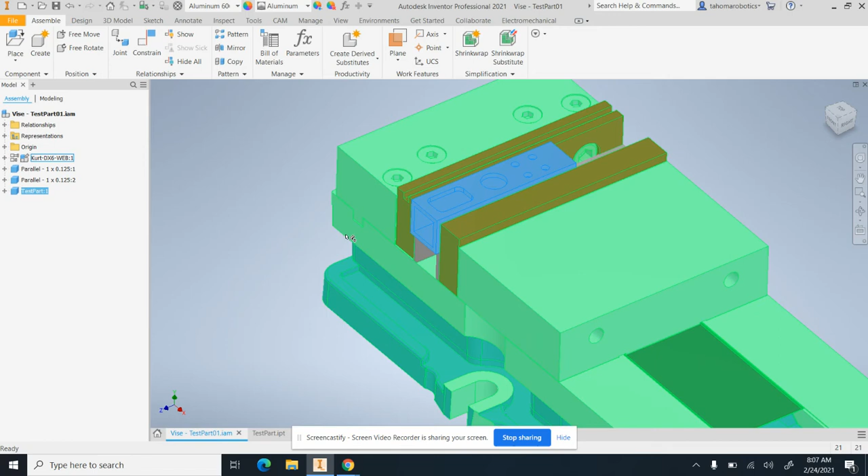In this video, we're going to go over setting up the work coordinate system for this test part that I showed being machined the other week in class. Basically, this part is sitting up on a couple of parallels, being held in the jaws of a vise, as you saw. Setting up the work coordinate system helps define how the part is oriented with respect to the machine.

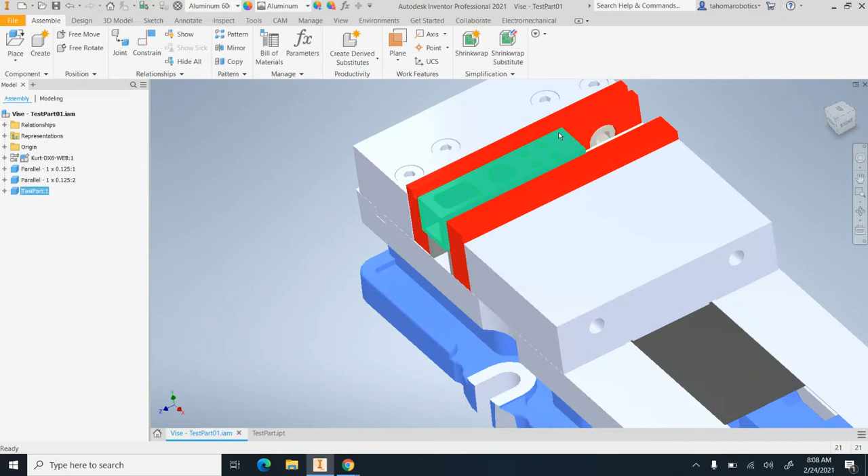If you recall, when squaring a vise up on a machine or tramming a vise, this back jaw here is parallel with the x-axis of the machine, or the left and right movement of the table. And once that vise is set up, when we put the part in it, this direction here is the x-axis. And so we need to define that. Setting up the work coordinate system is a two-part process where we define the origin as well as the orientation of each of the axes.

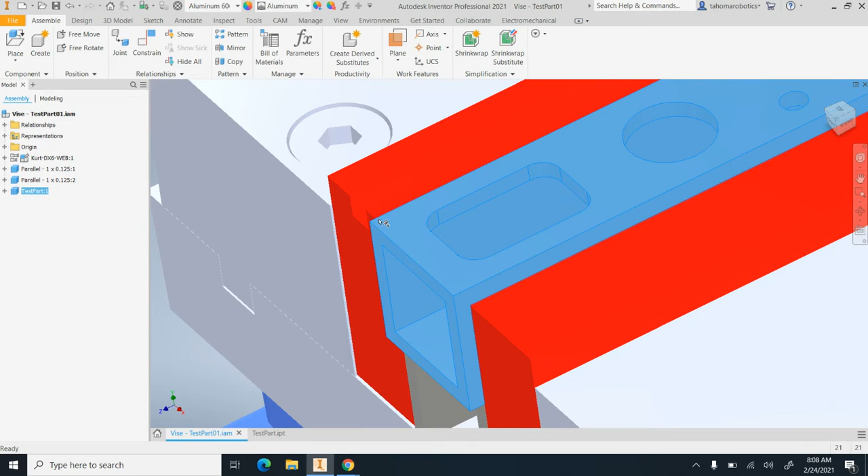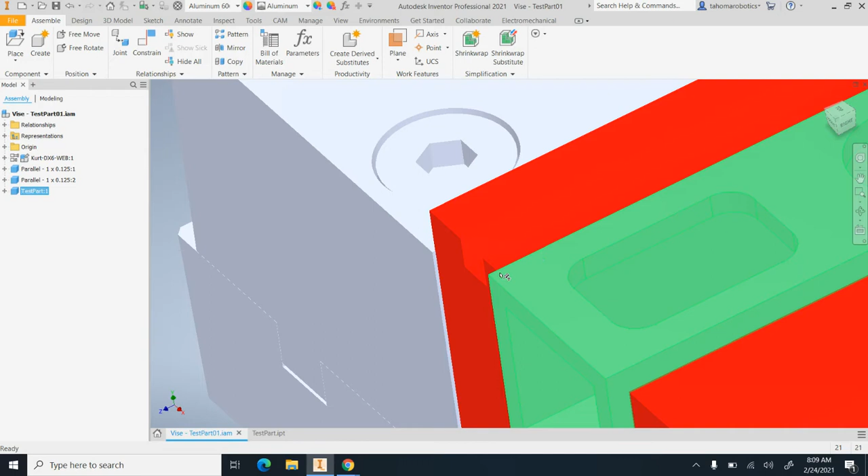Typically when we do this in this level of class, instead of having an entire model with the part and the vise, we're just going to do it for the part itself. So here's the part. Where we want to put the origin is in this back corner, and that is just a convention we use in class. We'll talk more about that later. This is going to be the x-axis. The y-axis is going to go here, and then the z-axis is up vertically from the part.

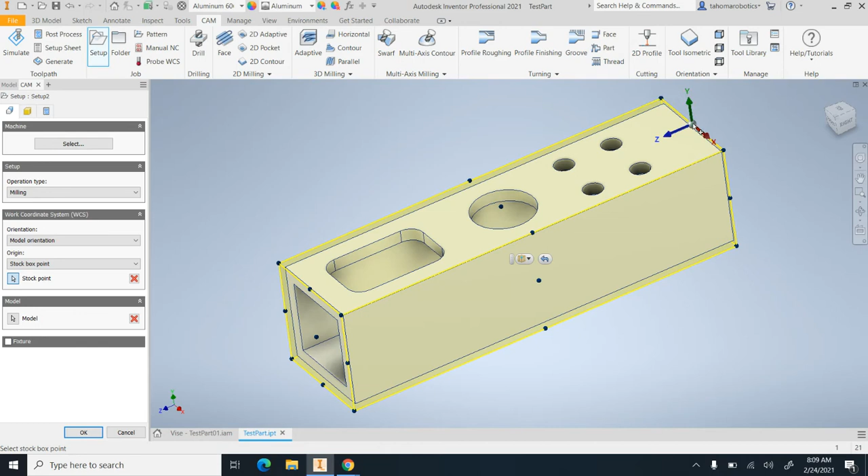Once you're in Inventor and have the part open, go to the CAM tab and then to Setup. You can see we have the gnomon here, and these points are linked to stock material, not the actual model. The stock material is the same size as the model. So for the work coordinate system origin, instead of a stock box point, we're going to use a model box point, and choose the back corner of the model. The issue is that the axes are not oriented properly.

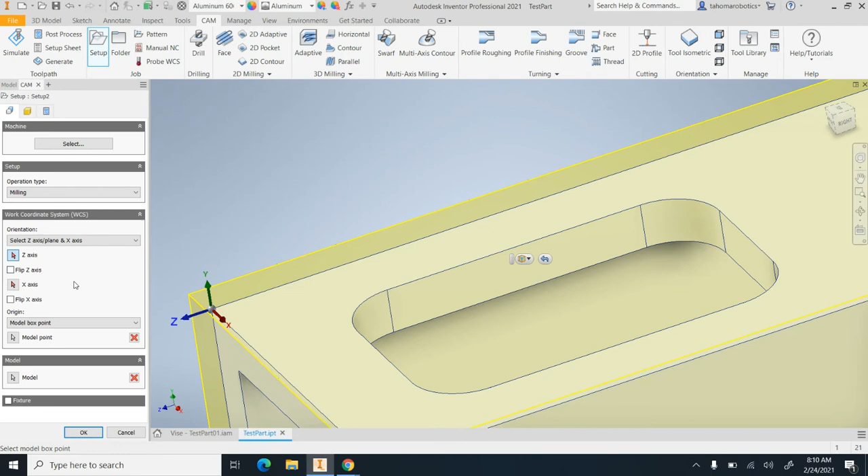We need the x-axis along this direction, and the z-axis needs to be vertical. That comes from the orientation drop-down. I prefer the first option, model, or select z-axis / plane and the x-axis. It first asks where the z-axis is going to be. I can click any line, like this line or that line, to align with the z-axis. Or I can select an entire plane, and the z-axis will be perpendicular or normal to that plane. I'm going to do the plane first to demonstrate.

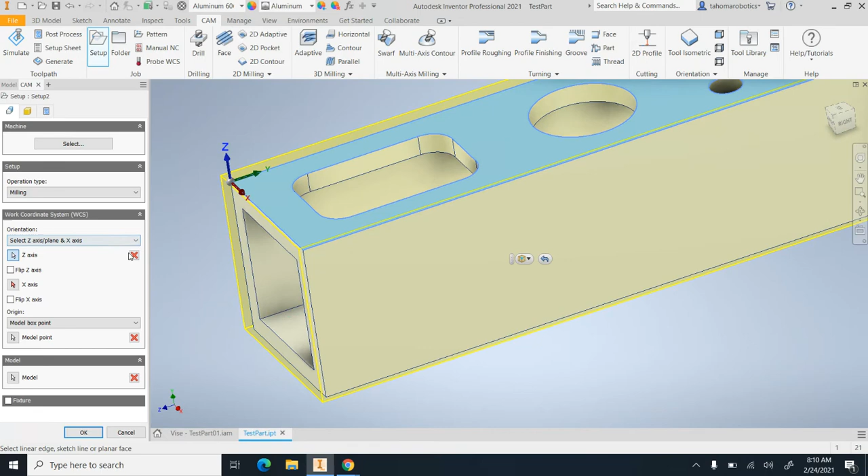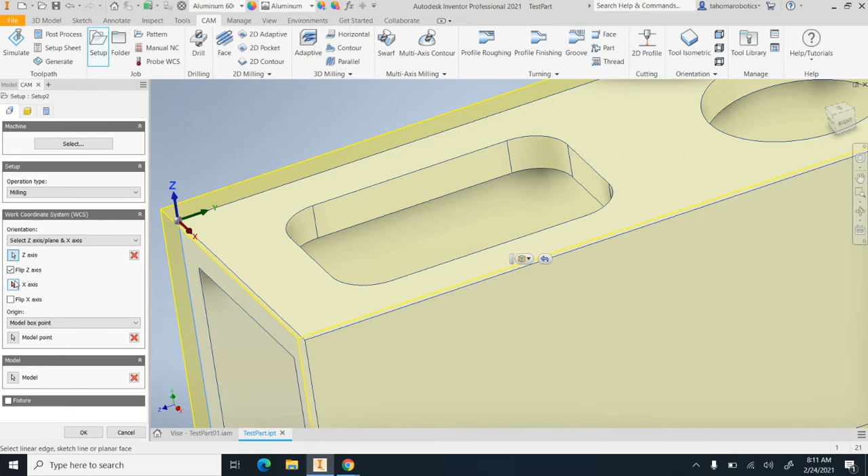When I click this plane, it makes the z-axis perpendicular to that. I'll undo that and show that I can also select a line. Notice the z-axis is aligned with that line, but in the wrong direction, so I can flip the direction there, or flip it by clicking the arrow in the model. Next I want the x-axis oriented properly. Right now, the y-axis is along the back jaw of the vise. I want the x-axis there, so I click x-axis, then click this line, and it puts the x-axis there.

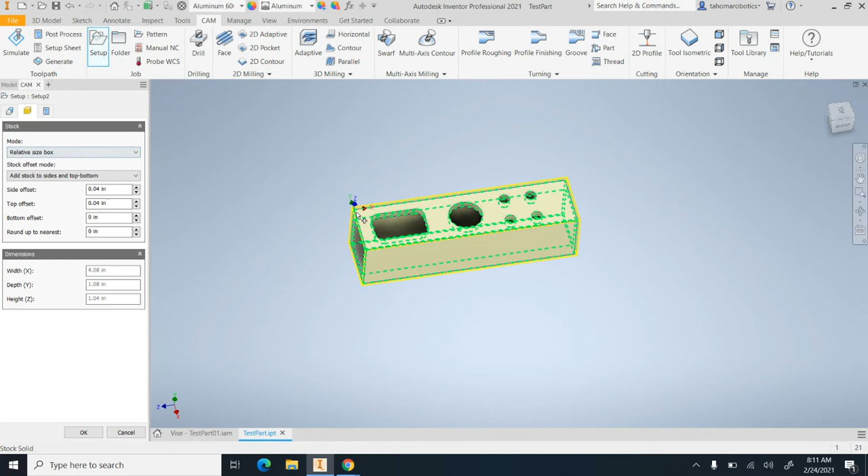Looking at a top-down view, we have our x, y, and z coming out of the screen toward us. That is the correct orientation of the work coordinate system. We have the origin at the right location, and our coordinate system is set up properly. Now I'm going to go to stock. Right now it's a relative size box, adding 40 thousandths of material to the sides and top of the part.

Since we machined this out of tubing that was the same size as the model, I'm going to use a fixed size box. The tubing was a little longer, so you can make it longer than the 4 inches of the part; we cut it about 4.5 inches. But if you remember, we faced the left side and used that to define the origin, putting it against a stopper in the machine. We'll talk more about telling the machine about the work coordinate system in later weeks.

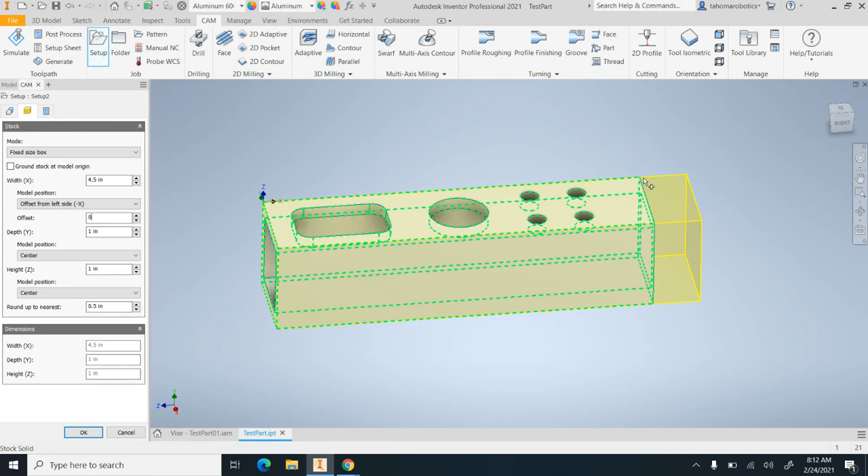Right now, I want the stock material flush with the face. So instead of adding a 1/4 inch to each side, I'm going to the offset from the -x and put a 0 offset. And that is the little overhang we had when we cut the stock a little long. So that is the first step of the computer-aided manufacturing, or CAM, setup: determining the work coordinate system. So I'm just going to go OK.

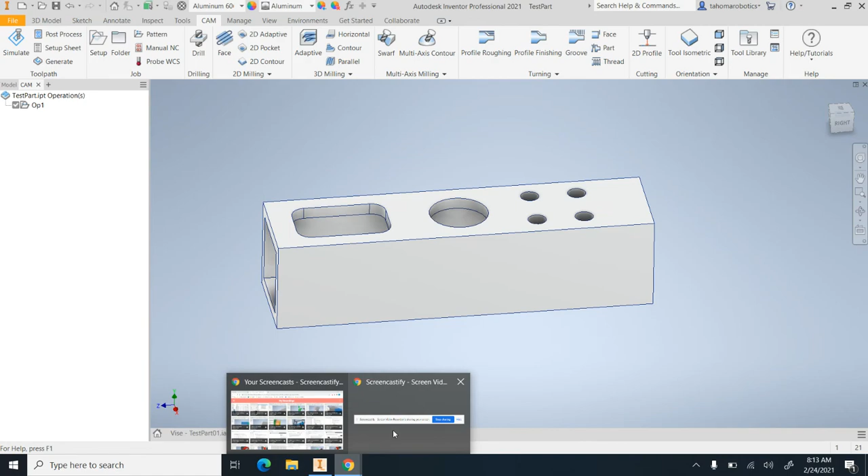Where it says setup, it gives it a number by default. Often I call it operation. If you click once, wait a moment, and click again, you can change it. Often I write op1 or something like that, or you can have it as setup 1. For this part, we're machining just this side. For more advanced parts, we'll have multiple setups or operations. Okay, so that should be good for you to set up the work coordinate system.